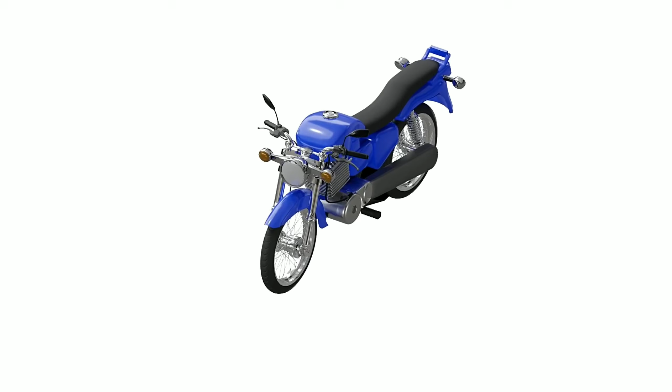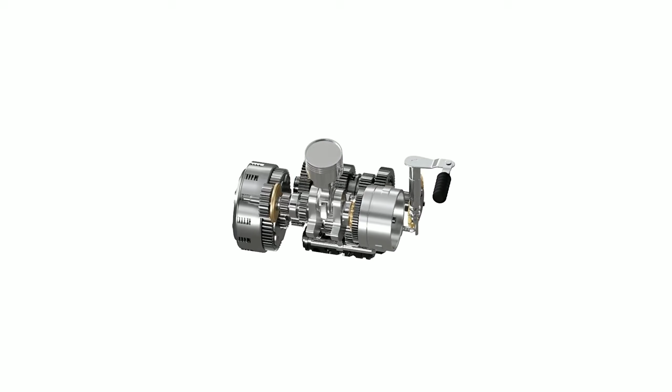The clutch is one of many essential components of a motorcycle. It is operated by pulling or releasing the clutch lever with the left hand. Before going into the details on working of a clutch, let's see how it is assembled in motorcycles.

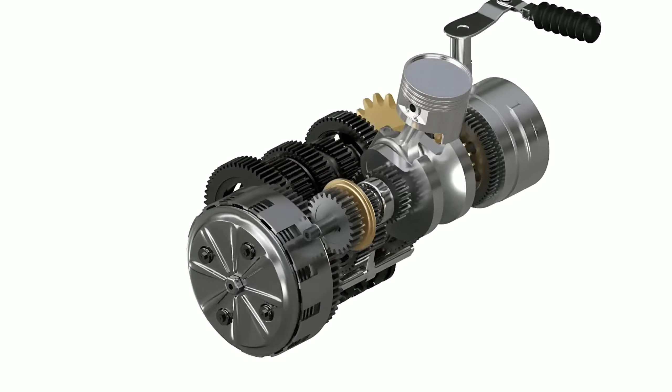The power from the engine is converted to rotary motion by the crankshaft as shown. This power is then transferred to the clutch housing. The clutch assembly transfers power to the input shaft of the gearbox. The power is then transferred to the output shaft and eventually to the rear wheel of the motorcycle.

The clutch assembly itself is a combination of several parts. It consists of a pressure plate held in place by using several springs and screws. This plate presses against the clutch pack. The clutch pack consists of several steel and friction plates placed in alternate positions. The clutch basket and the inner hub are assembled with their axes aligned to the input shaft of the gearbox.

Now let's understand how a clutch works. The clutch basket freewheels with respect to the gearbox. The engine power will spin the clutch basket, but it will not transfer any power to the gearbox. However, the inner hub is connected to the input shaft of the gearbox. If we spin this inner hub, then it will also spin the gearbox input shaft.

Let's take a hypothetical connector with teeth on its internal and external portion that can interlock with both the clutch basket and the inner hub. If we insert this hypothetical connector between the clutch basket and the inner hub, then we can spin both of these at once and the engine power reaches the gearbox. And if we remove this hypothetical connector, the clutch basket and inner hub will be independent again and the engine power is disconnected.

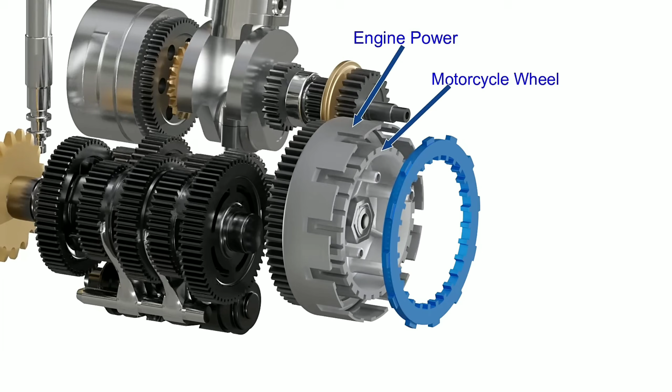But there is a problem in using this connector. When the connector is removed, the inner hub spins due to inertia of the motorcycle rear wheel, and the outer basket spins due to engine power. This is why these two components start spinning at different speeds.

In order to interlock with both of these non-synchronized spinning components, the hypothetical connector will have to spin at two different speeds at the same time, which is impossible. For example, if it matches the inner hub speed, then interlocking this connector with the outer basket will be either impossible or too difficult. To eliminate this problem, the clutch pack is used in place of this hypothetical connector.

Unlike our hypothetical connector, the clutch pack is a combination of separate circular plates. Let's take any two adjacent plates from the clutch pack. One of them is a friction plate and the other is a steel plate. The friction plate has teeth on the outer circumference, which always interlocks with the clutch basket and can slide sideways along this clutch basket. The plate spins with the clutch basket, but doesn't affect the inner hub.

The steel plate has teeth in its inner portion, which always interlocks with the grooves in the inner hub and can slide sideways along this hub. This plate spins with the inner hub, but doesn't affect the outer basket.

As these plates can slide sideways, we can press them together, gradually increasing friction so that both of them start acting like a single unit, like our hypothetical connector. With this arrangement, if we spin the outer basket, the inner hub will also spin. This will eventually transfer power from the engine to the gearbox.

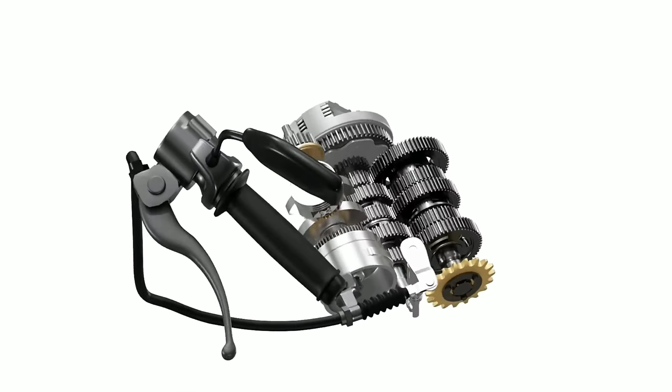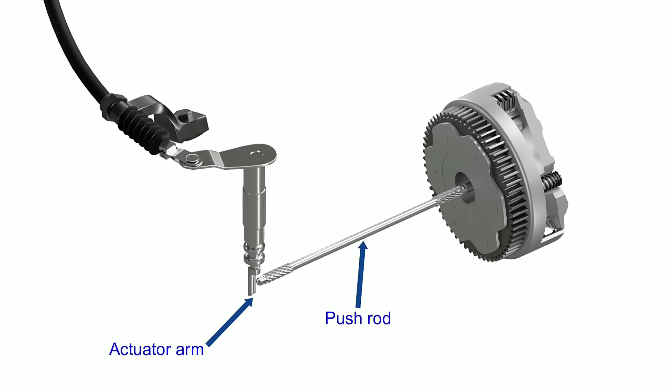As the clutch lever is pulled, a cable or hydraulic system rotates an actuator arm as shown in the animation. This arm presses against the push rod towards the clutch. This rod goes through a duct inside the input shaft and pushes the pressure plate, releasing the pressure on the clutch pack.

When the clutch lever is released, the springs again apply pressure to the clutch pack, as shown in the animation.